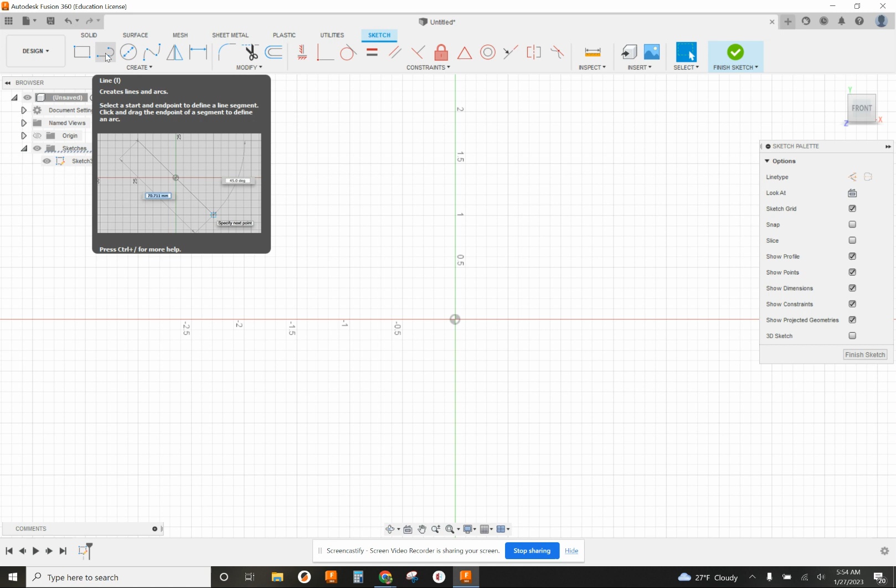So I'm going to create a sketch on my front plane. The first thing I'm going to do is use a construction line. We learned about this in a different video. I'm going to click on line, construction, and then from the datum, I'm going to create a line straight up. This construction line will not be used for any of the actual extrusions themselves, but it will be used to help us create a mirrored object.

So what does that look like? I'm just going to use some regular lines. The line tool, I'm going to deactivate construction line. I can't be in construction line or this won't work, so make sure that's not checked off blue. My first click's going to be right there in the datum.

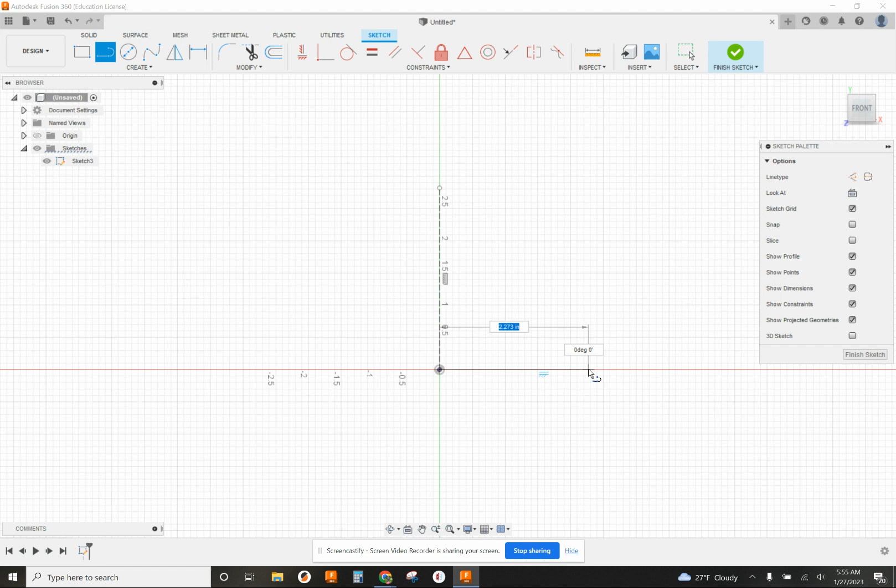And I'll go straight over here. I'll do a little bit of an angle here, straight up, over, down to here, and then over. I'm going to end right on this construction line. And hit escape. Now you notice this is all blue, so I've got to dimension it.

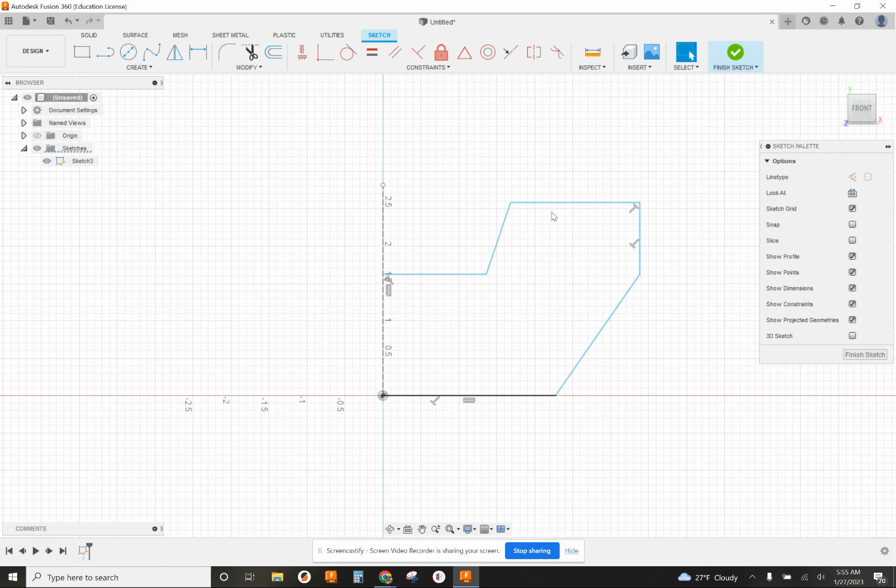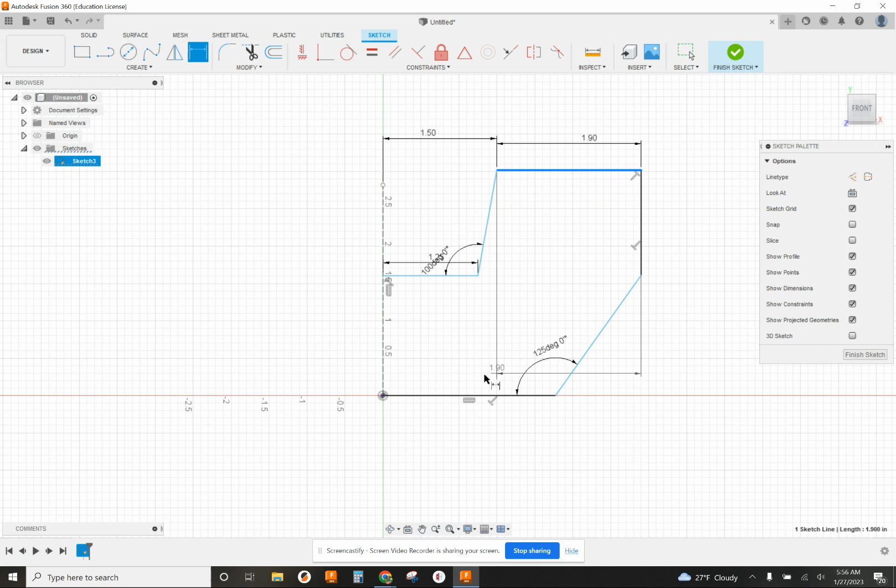So I'm going to put this angle right here at 125 degrees. This line is 1.250. Angle here, 100 degrees. Distance from here to here, 1.5. This distance, 1.9. Here to here. Now we don't have to dimension this to demonstrate how this works, but I like to have a model that's fully dimensioned.

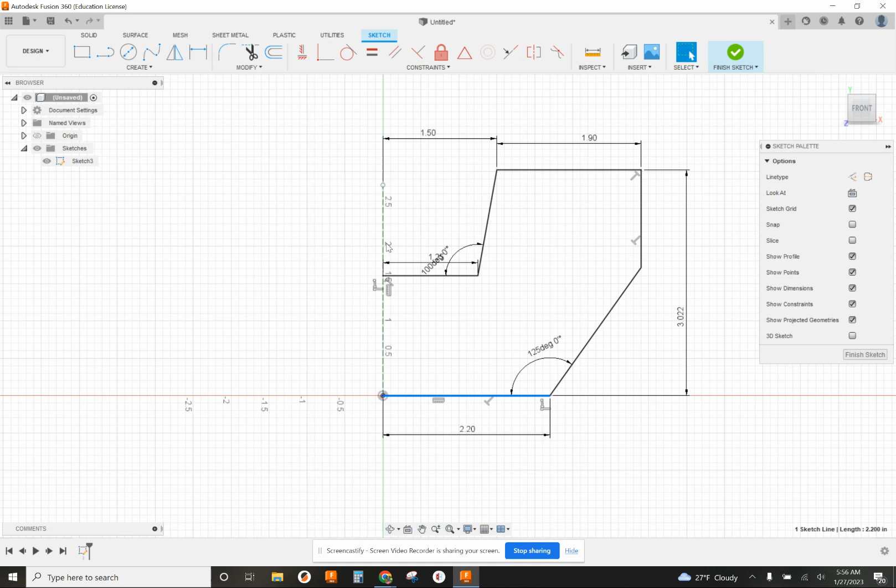What do we got left? Something's movable over here. Oh, there we go. I'm going to change this one right here. Dimension that 2.2. So this is half of what we're going to end up having. We're going to flip all of these solid lines around this construction line, and then we'll have the whole shape of the object that I'm looking to build.

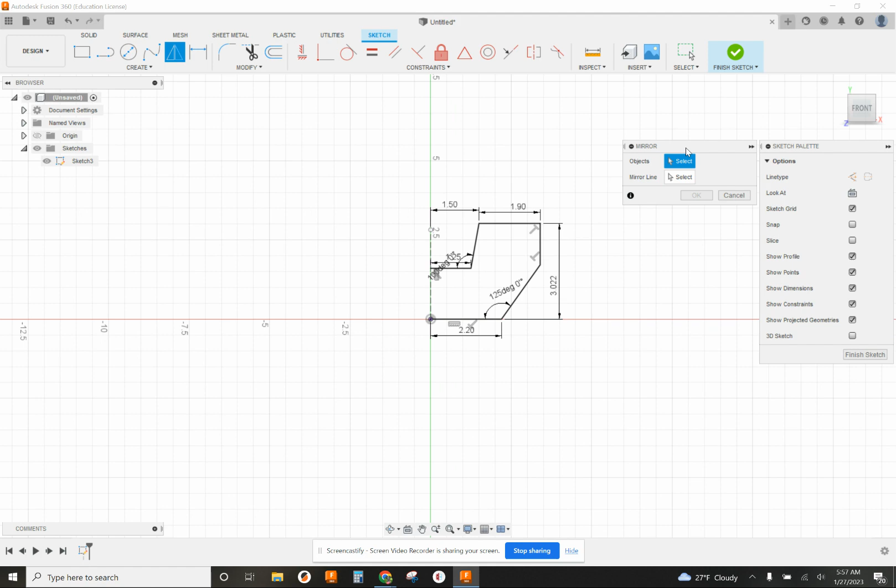What I want to do is click on the mirror tool right here, or create mirror. The first thing that this little pop-up box wants us to do is select the objects that we're mirroring. The objects we are mirroring are the solid lines, so I'm going to pick each one of those. Then mirror line. I'll click on that. It wants us to select the line that this is all going to be mirrored about. So I'm going to click the construction line, and it copies everything, but just the opposite, on the opposite side of the line.

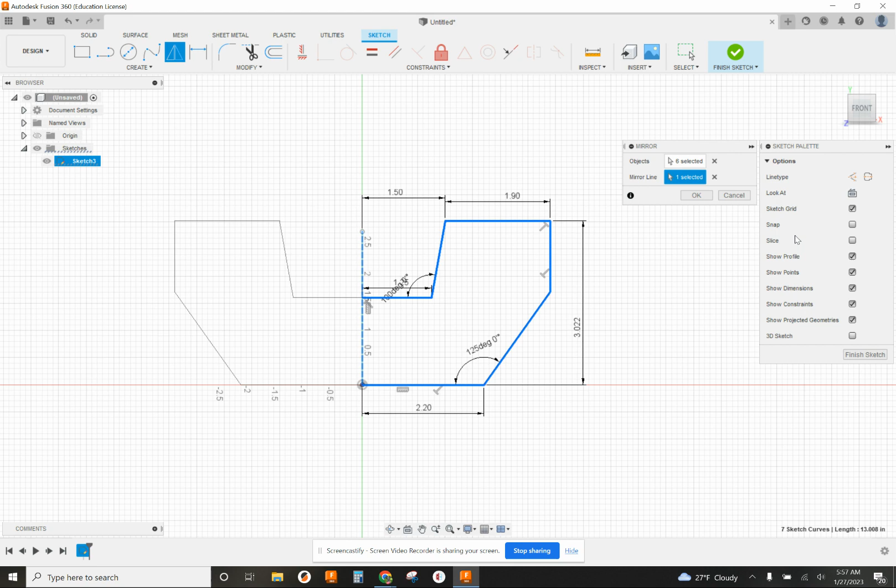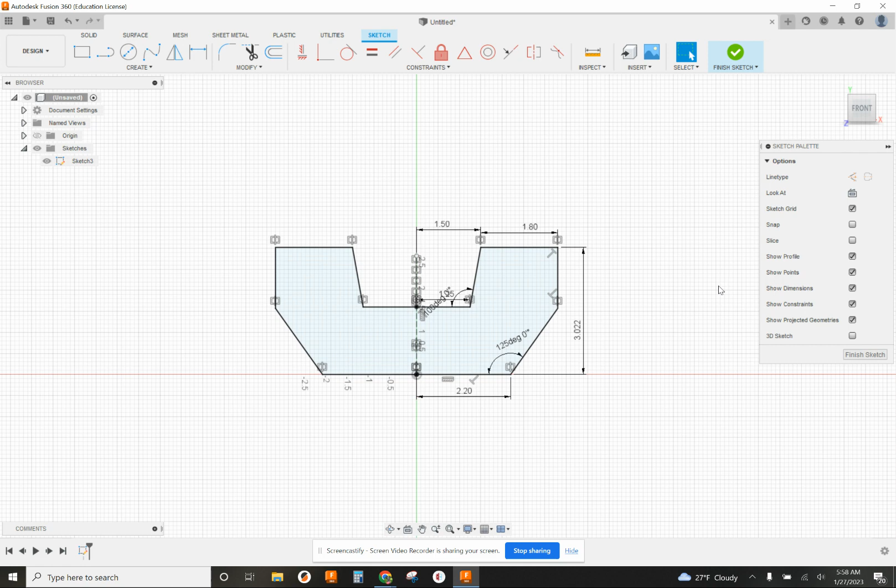That's the mirroring effect. And it adds all these little constraints here. We don't have to dimension everything. Because this is mirrored and it remembers it, anything we change as far as dimensions over here will be repeated on the opposite side. So if I change this to 100 degrees, that will change. Of course, that doesn't look any good, so I'll undo that. But here's a better example, 1.8. Both sides changed at the same time.

So finish your sketch, do a press pull of 1 inch, and you have a part that's nice and symmetrical. Cool thing is you can go back, open that sketch again, add to it, and then redefine that extrude feature. So let's say we also needed a couple of holes in here. Instead of using the hole tool, we can actually build this into it right now.

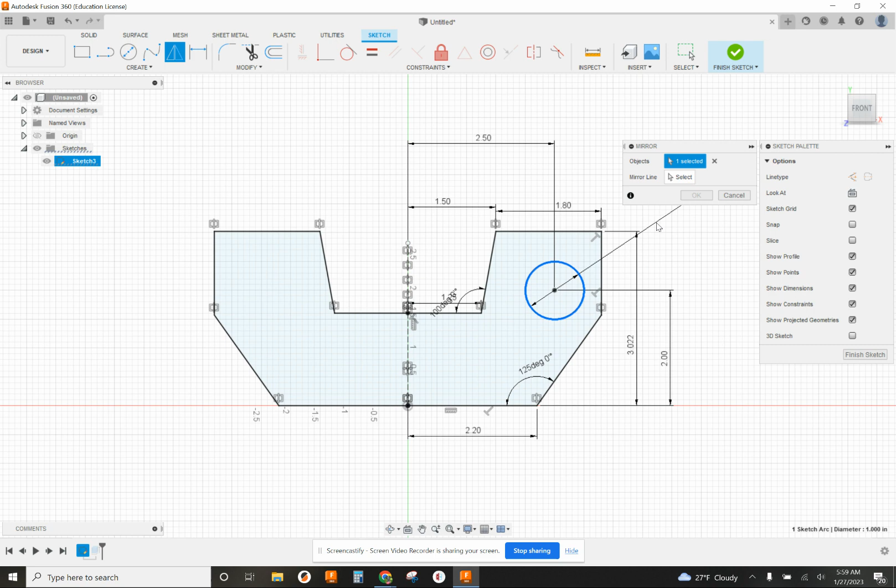So I'm going to dimension the size of the hole. Inch. Location from the datum up is 2 inches. And from the center line over is 2.5 inches. I can also do a mirror of that feature right there. So I can do the mirror of this. Mirror line is this one.

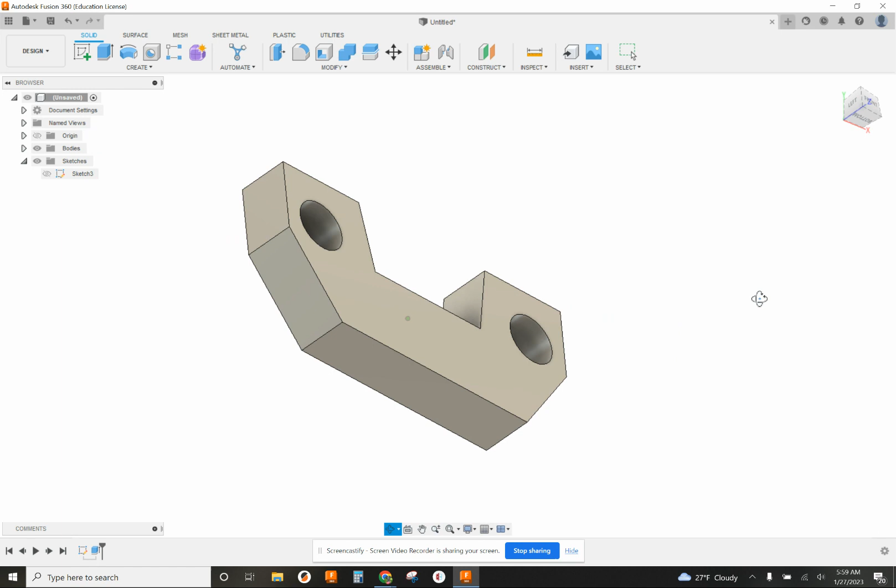Finish. Now, you don't see anything happening here, but I can open this up, unselect my profiles and just click in here. And now it ignores that area where the two holes are. So just like that, we've got two holes built into our original sketch. With a couple of different tools, you can do a lot with just one sketch and one extrude. You don't have to build up a whole lengthy series of components in the timeline. So that mirror tool is pretty helpful.